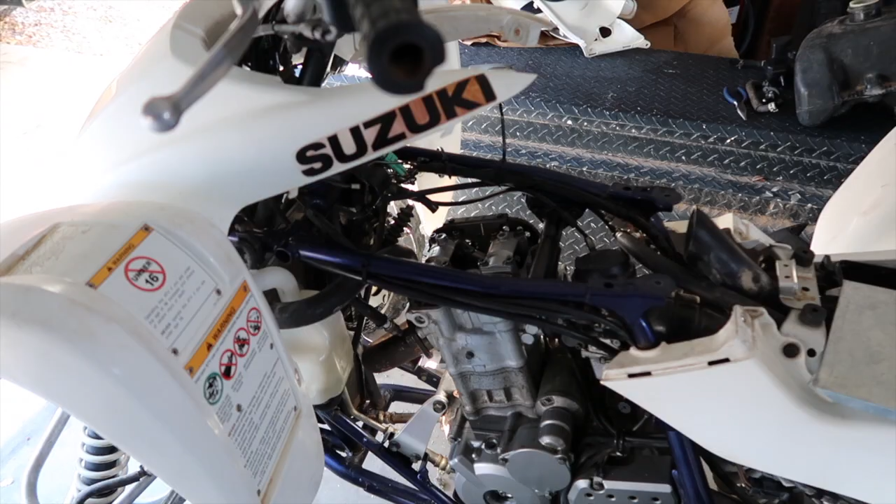So for you guys that don't know, this is a LTZ 400 Suzuki. It's like a 2005, I believe.

Down here we have a cover that gets taken off with the Allen key, and then right here, this is the top part where you can see the top dead center, where it'll mark it. It has a little line right here, and this right here allows you to turn the crank to get it to top dead center.

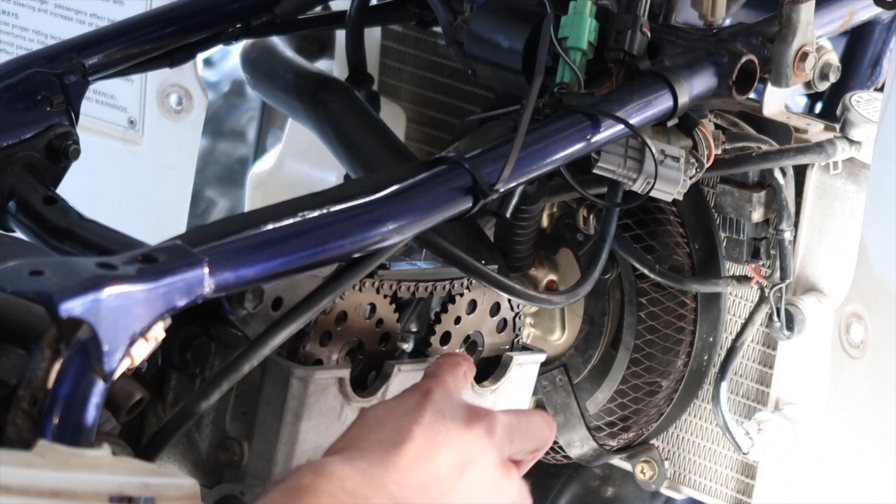Now let's go on the other side. If you want to check if your quad is timed right, these are the two cams. Right here is a 1, up here is going to be a 2, and right here is going to be a 3. It'll have a line that's aligned with the outer case right here, so it'll be lined up here and here, with a 1, 2, and 3. That's on the exhaust cam. On the intake cam, it's going to be pretty much the same thing, but on the very top right here, it's going to have a 3.

So it's going to have a 1, 2, and 3, with little lines that align. From the 2 to the 3, there has to be 15 pins - each one of these is a pin, so 15 from wherever it starts, the 2 to the 3. If that is correct, and you still have your top dead center on the left side, then you know your quad is timed right. So that means it's not the timing if you're trying to figure out why it's not starting - it can't be the timing.

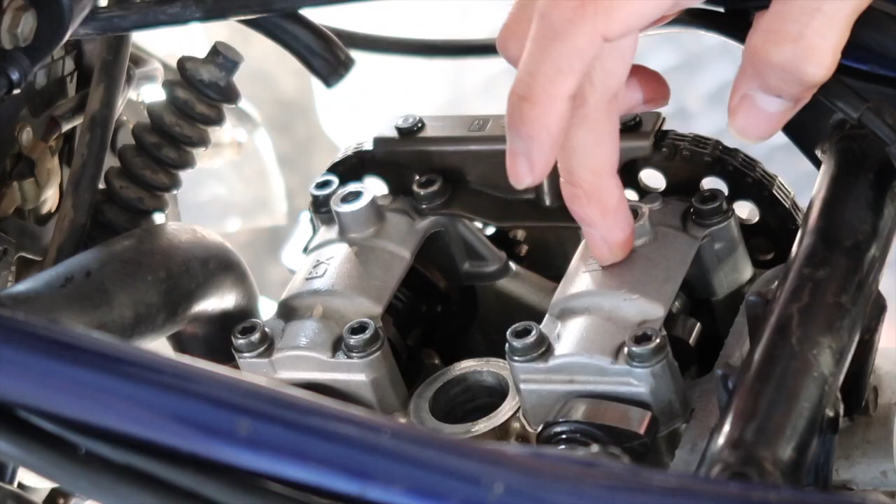So the next thing is checking the valve clearance. It's supposed to be from 0.10 to 0.20 millimeters - you could do it in inches too, but this is in millimeters. So I'm gonna grab my 0.10 and start off with that and see if it goes in. See, it's not going in - that's too tight.

You want to put it right here under where the tappet is, and then the cam. See, on this side it's too tight, on this side it's too loose. So maybe that's already our problem for this one, and that's causing the valve to not sit where it's properly supposed to sit, so it's not sealing up the pressure.

So now let's try a 0.13 where this one is. See, the 0.13 millimeters doesn't fit, so this one is actually right - it's literally at point 10 where it's supposed to be. But let's see this side - this side was tighter than this side. So this one right here is right.

So let's check, let's go 1 down. This is 0.08 - see, not even a 0.08 fits through there, so that's way too tight. Let's try a 0.5... 0.05 - oh see, look, we can get a 0.05 millimeter in there. So this one is too tight.

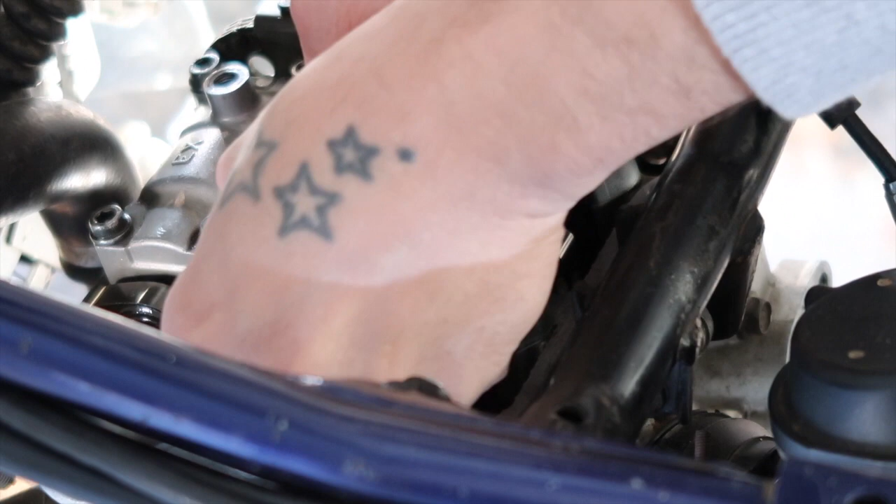See where we're at. Oh see, this one's already too tight. So it doesn't go in - you need to get a little bit of drag, it should slide in and you should get a little bit of a drag when you pull it out. But obviously if it doesn't go in, then you already know off the bat that it's probably not right.

And it looks like the exhaust side on this one is also too tight. I wonder what they're at though - I'm writing all these down. Definitely a good idea to write these down, so that way when you take the tops off right here and then the cams off, you can see what size shims are, so that way you know if you need a smaller one or a bigger one. We'll get to that shortly.

So the 0.20 didn't work. The next one I got is a 0.15 - not working out either. Oh well, that explains everything. So the 0.15 is wrong. 0.13? Nothing. Nothing on that one. Wow, that's terrible.

That's why we never got this bad boy started. I must have got the measurements wrong with the shims that I put in there, maybe. Yep. Nope, not even a 0.8, so it looks like we're gonna go to 0.5. Oh look, 0.5 works.

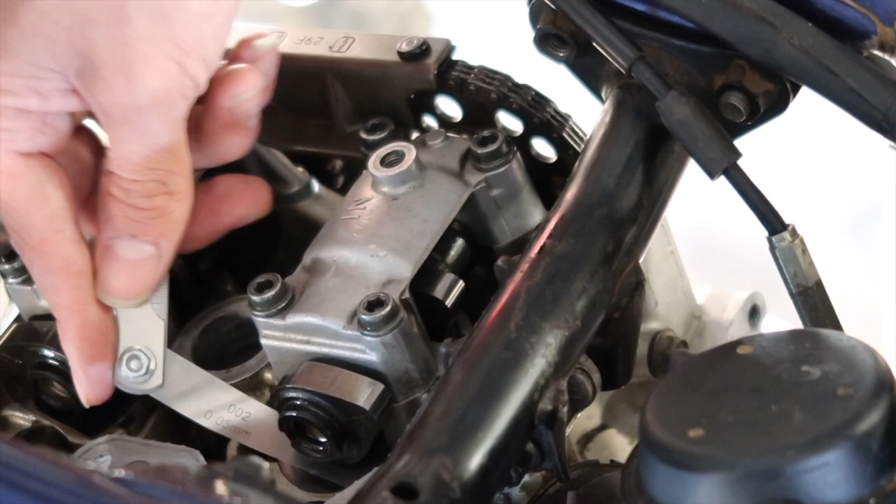See if I can show you guys a little bit better. So I'll show you guys with this one, because this one you can see pretty good. When you slide it under it, you see how that one goes through? So you guys see right here, this one is going through. When you pull it out, you want a slight drag. Obviously this one is too small, so it slides with it really good, but that's what I'm trying to show you guys.

Okay, so let's see. As you can see, this one's going in. But see, if we go - that was a 0.05. But if we go to the next size up, which is a 0.8 - oh, it does take actually a 0.8. Okay, so 0.8 it takes, let's see what the next one is. It should be a 0.10. It takes a - okay, so it does take a 0.10.

I think I had two overlapping each other. I think the 8 and the 10 were overlapping each other. As you can see, you can't even notice that they're overlapped sometimes, they're that tiny. But see, the 13 - alright, so on this one it's 0.10, which is supposed to be 0.20 to 0.30. So we're 0.10 millimeters off on both of these.

Then on this one, what we figured out is that this one is good, but this one is 0.05, so it needs an extra 0.05 to be within spec, because this one's 0.10 to 0.20, so it could be anywhere in between those. So we're gonna take off this side and this side on this one.

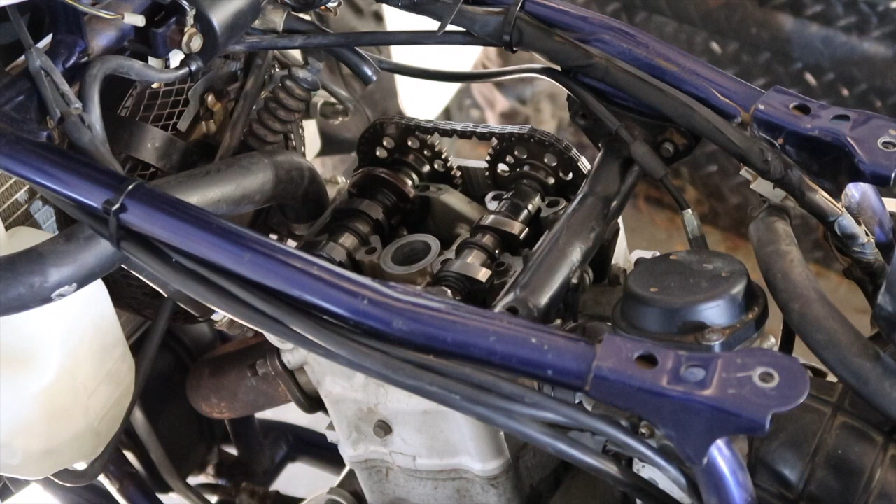We're gonna take off the cams and see what we got for each shim. I'm just gonna use a magnet to pull these out. So this is the one that was wrong.

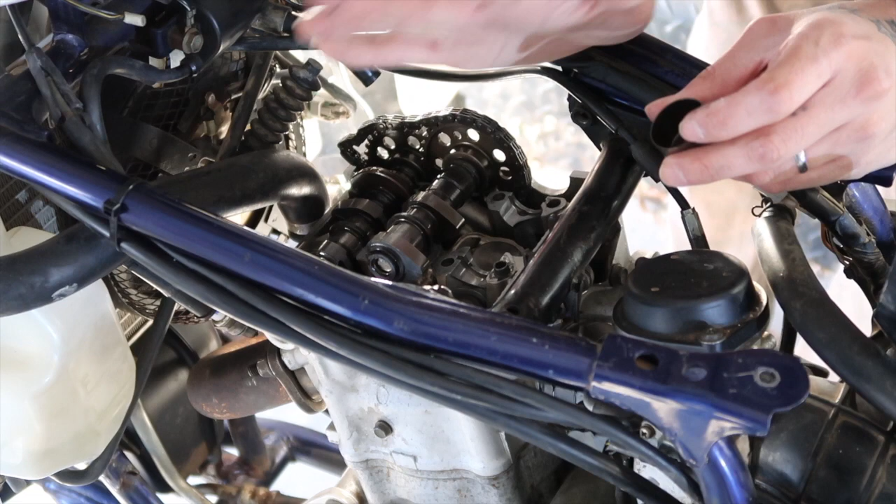It looks like it had a 280 in here. I had a 280, and this one was the one that was reading at 0.05 millimeters. So what I'm gonna do is put a 275 in there.

So it should drop at 5, and then we should have it pretty much where it should be at. I'm kind of just gonna sit it back right there so it doesn't move as much as I think it should. Now we have that one hopefully fixed, and I'm gonna just pull this one over. And now let's check out the other ones.

So these ones were at 0.10, and we needed them to be at 20 to 0.30 millimeters. And the shims that we had in these was a 310. It's gonna be very, very hard to see that. Yeah, there's no way. Okay, well, what we had in here was a 310. So I'm gonna put this one aside.

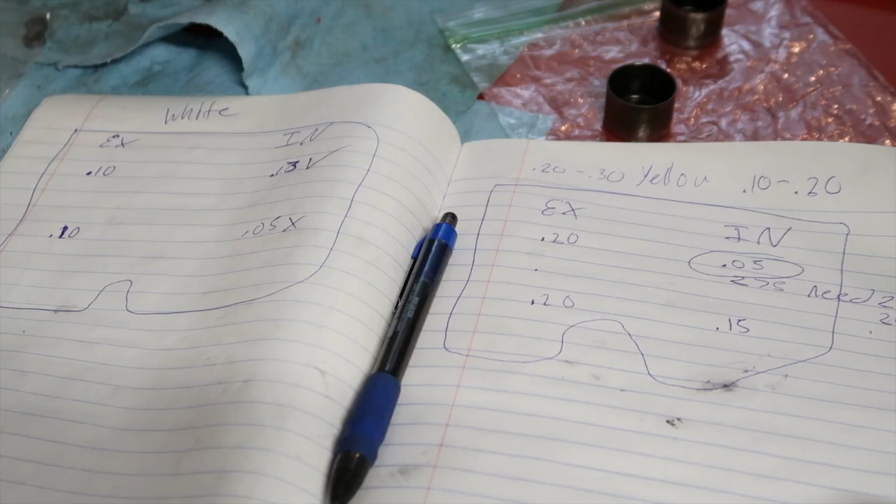And this one, I believe it's probably gonna be a 310 as well. Okay, so here I'm at my book. This is for the yellow one, and this is for the white one. This is what I was telling you guys about keeping track. So my intake is kind of backwards, but this is the intake.

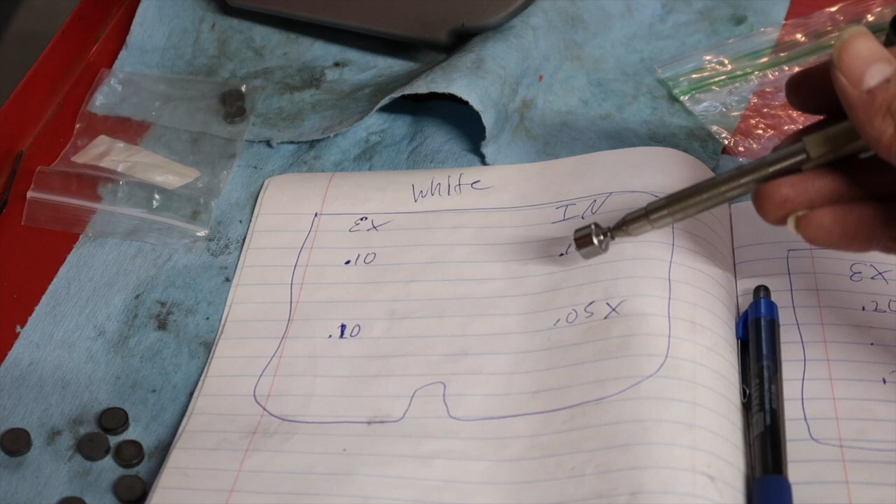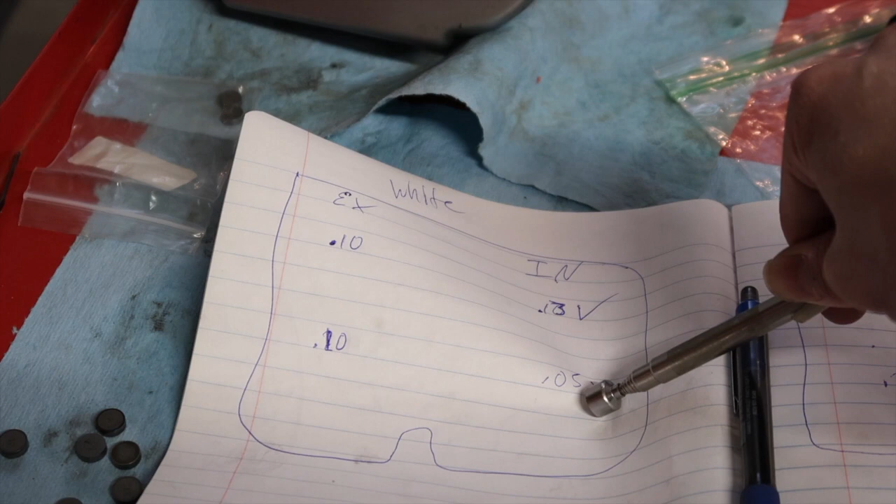So this was reading at 0.13, which is good. This one was the 0.05 that had the 280 cam, or the 80 shim. So we put a 275. So we want it smaller to give it more space.

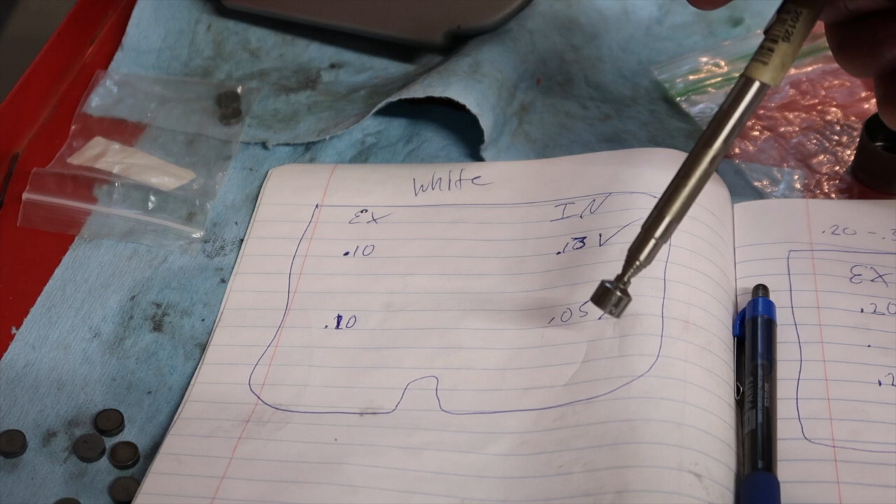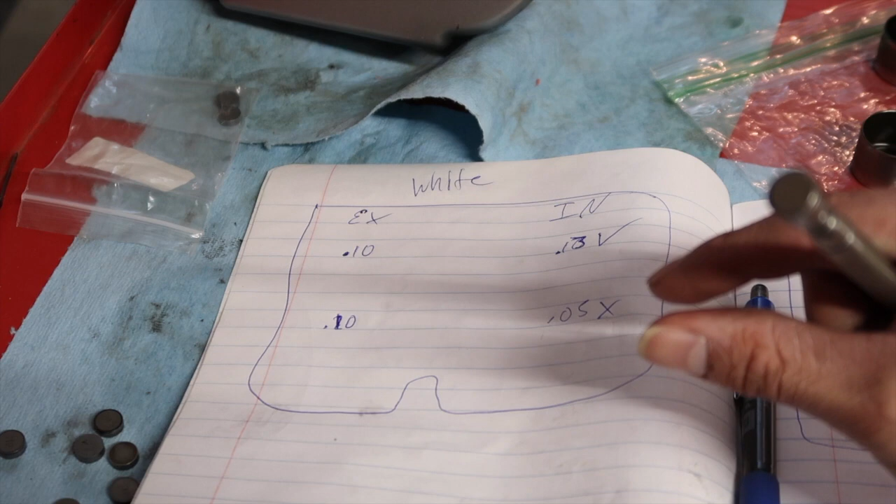So now realistically this one should be at 0.10, because we're basically minusing 0.05 millimeter on the shim. So on the shim, it's basically, the shim is gonna get smaller, which means the tappet's gonna go down, which means the space between the tappet and the cam should get bigger. So realistically, this should be at a 0.10 now. So we fixed that one.

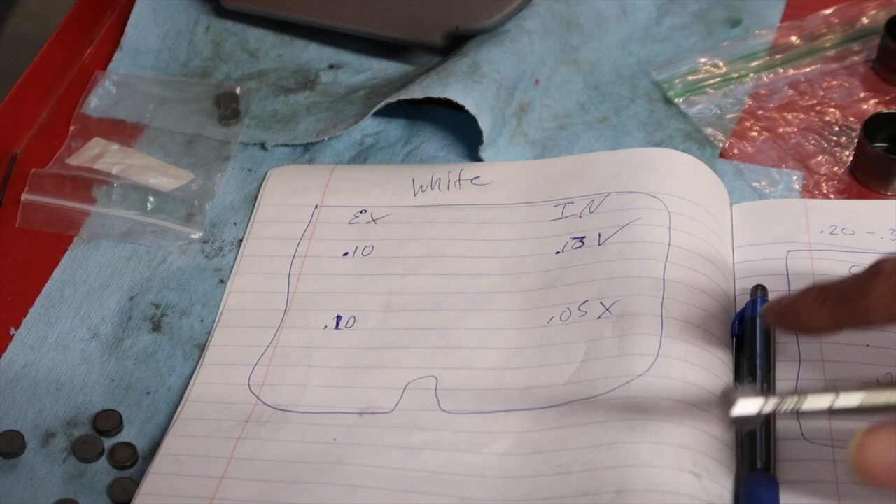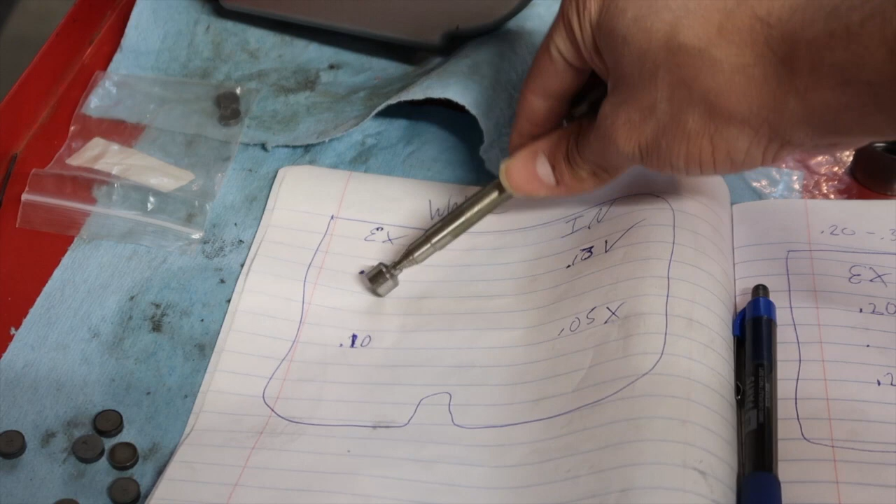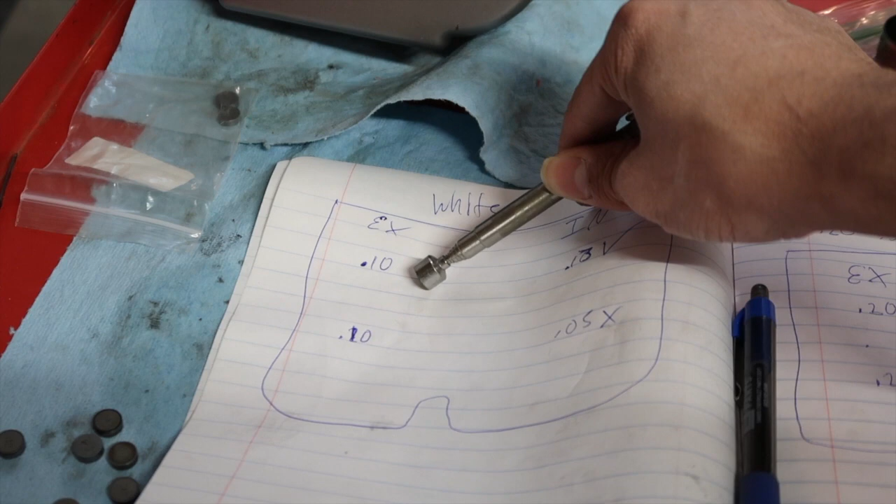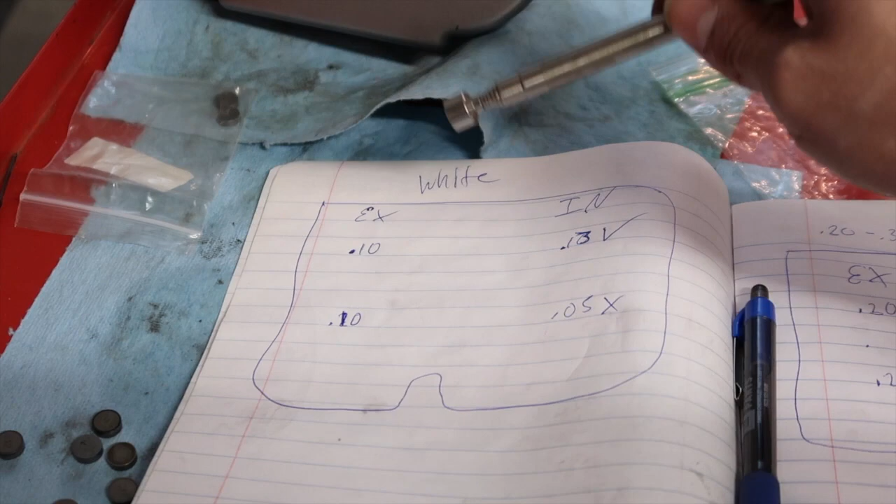Now these ones are 0.10, so we need them to be at 0.20 through 0.30. So what we had in these was a 310. So realistically, we need 300. So we're gonna do the same thing. We need a minus 10 from the shim. So it's at 310, so we need to make it a 300 in order to have 0.20 millimeter space in between that tappet and that cam. So that's what we're gonna do.

So I have a bunch of shims over here. Hopefully I have the right one for it. If not, something very close.

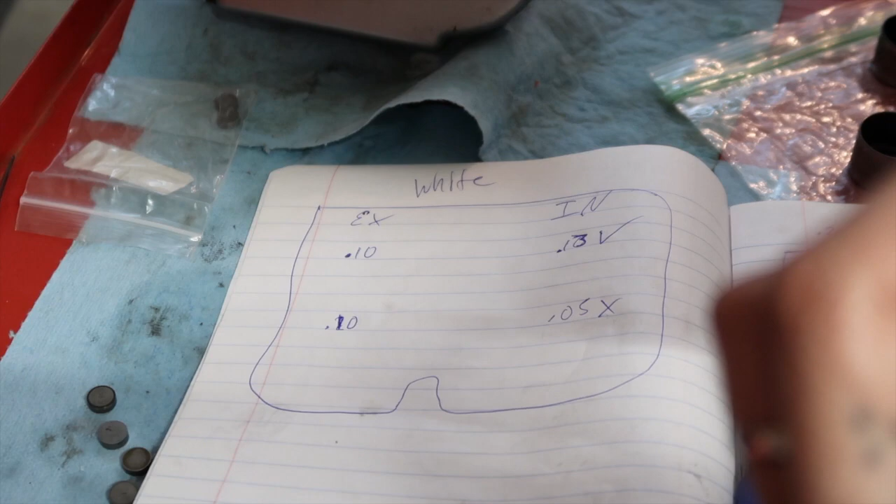Okay, you guys, so there you have it. That's what we got done so far, right now at least. The thing is that we don't have the right shims in order to put them back together for the white quad. What I am going to do is finish doing the same thing to the yellow quad, but I'm not going to record it just because it's pointless to record me doing the same thing over.

But I might try to see if I can get a hold of the guy that I told you guys I have local, and hopefully he has some in stock. I know he sells them for like $6 a piece, but if I can get these 2 quads to run today, I will be so happy.

But worst case scenario, you guys, if I don't get them running in this video, that was it pretty much. So I showed you guys how to do the valve clearance, timing, and how to figure out what shim size you need.